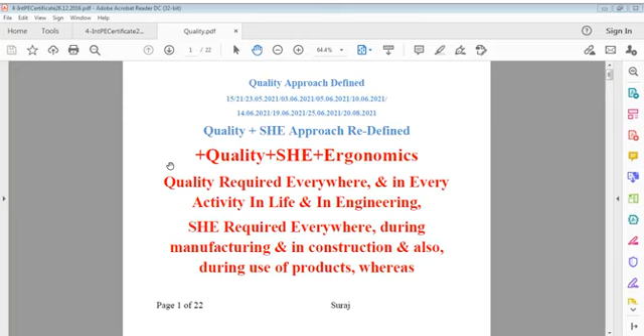Earth is for us. We have to respect that. And if we don't respect that, we do a mistake. We have to respect that. It's our job, it's our duty, and if we don't do that, certainly we shall have to see problems, because it is earth that enriches earth.

My purpose is that one should understand we are doing nothing. In fact, human is nothing. Every human is a body and soul combination. We have nothing of our own, and even this body in which everybody lives is not our own. It is given to us. It was given to us since the beginning of our lives, and we shall use this body till we live, we travel on this planet. When this body is not mine, blood is not mine, soul is mine. Soul cannot be distracted, this is understood.

We have to take safety in our lives. Whatever work we do, payable work or non-payable work, irrespective of that, we have to do it keeping ourselves safe, keeping involved people safe, keeping everybody safe. If we don't do that, certainly we shall suffer. This point must be understood.

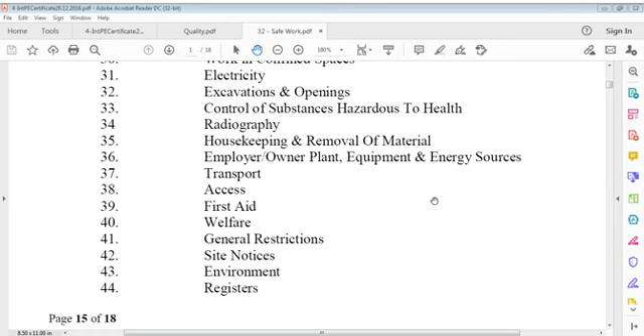These are general, then we can say registers and authorizations. Now we've gone through many points and we have glossary of terms, then we can say responsibility general. We have covered some points in this, and the PPEs etc. we did. I don't want to repeat.

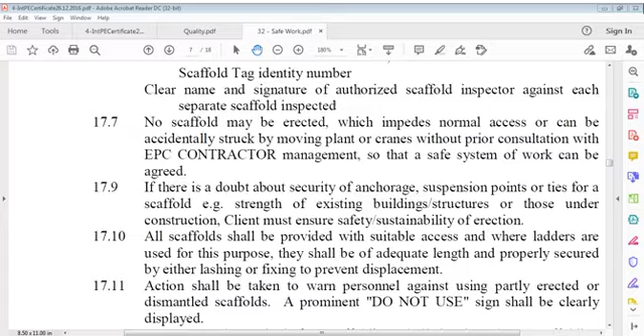Permit to work is a very important point, and also risk assessments and method statements I had done, just a brief on that. Then method statement, we can know it should be further: working at heights, man riding basket, safety harness, scaffolding, ladders. So let's say it's no problem if you go through some repetition, it doesn't make a difference.

Let's say we start with risk assessments. Baskets we had done, then risk assessments: the EPC contractor shall produce risk assessments for all works under control. Risk assessment form shall provide client written information on the following points: identification of all hazards applicable to significant risk activities, details of measures in place to control risk, justification that existing control measures are adequate, and if not, a detailed action plan about how to control risks.

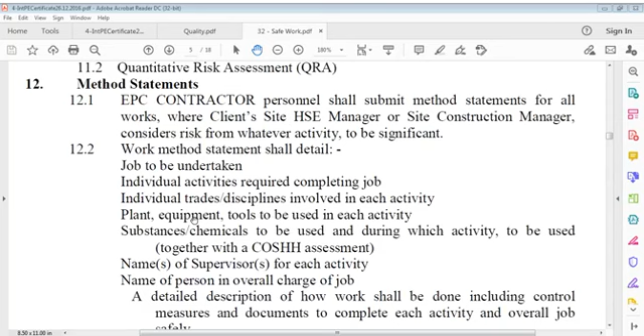So we can say what job is to be undertaken is indicated on the method statement: individual activities required to complete that job, trades or disciplines involved in each activity, what plants, what equipment, what tools shall be used in each activity. These are referred, meaning we will not write everything but references would be written, and substances and chemicals to be used, and during which activity to be used, together with a COSHH assessment.

Supervisors, responsibility supervisors, who is in charge, shall give a detailed description of how work shall be conducted and carried out, including control measures and documents to complete each activity and overall job safety. Now, pre-job discussion—there are so many other points a job description or method statement can include, it depends on each activity.

It depends on what information we need to provide to our personnel on site so they can take care of safety and technicalities. For very nominal, repeated activities they already know, but for a specific activity, the method statement is very important. For normal, repetitive activities, standard method statements can be prepared and referred to.

Standard means a statement that can be applied if it exists, for example for blinding concrete, backfill, shuttering, steel fixing, or curing. We can write such methods and call them standard or normal methods, which can be repeated for general work activities and used every time.

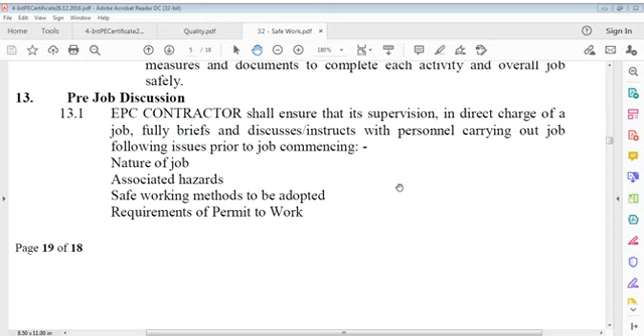Nature of job is the main point—what nature of job it is can be known from the activity. Then, what are the associated hazards—every experienced person should know what can happen while doing something, what problems we can see on site, what dangers to our people or from our machines. That's called associated hazards: electrical hazard, mechanical hazard, human hazard.

Likewise, safe working methods should be adopted to prevent people from the impact of hazards. What way we should work, what is the best method, which is time-saving, which provides safety coverage, and also keeping in view the weather conditions we have to respond to.

Requirements of permit to work—whether you need a work permit depends on the location of your work. If the regulations of the operating authority require that you get this permit, we have to get it. No way out. Working at heights.

Working at height is very dangerous and very difficult if we leave it to our employees or staff alone—it won't work. Contractor personnel shall not interfere with access arrangements, that is scaffolding, ladders, etc. Whatever is required shall have to be done—no way out, because it is a question of life and death. No interference by anybody.

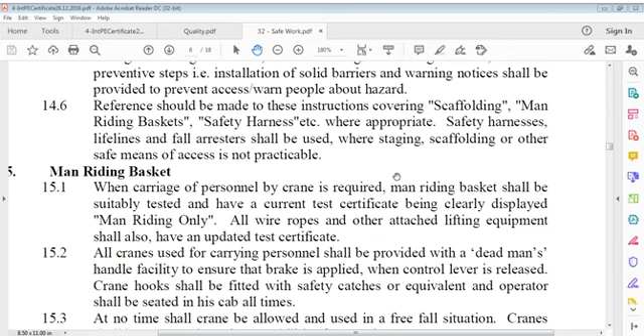Reference should be made to instructions covering scaffolding, man riding baskets, safety harnesses, etc., where appropriate depending on requirement. Safety harnesses, lifelines and fall arresters shall be used—we have explained all this, what is safety harness, lifeline, and fall arresters, already explained in past videos—where staging, scaffolding or other safe means of access is not practicable.

Man riding basket is a very important equipment, like a crane, when carrying personnel by crane is required. The person or worker riding the basket—though man riding basket is the usual term—if not for a man only, otherwise employee riding basket or personal riding basket.

It shall be suitably tested and must have a current test certificate clearly displayed on this machine, man riding only. All wire ropes and other attached lifting equipment shall also have an updated test certificate. All cranes used for carrying personnel shall be provided with dead man's handle facility, to ensure that the brake is applied when the control lever is released.

Crane hooks shall be fitted with safety catches or equivalent, and operators shall be seated in the cab at all times. This means when the control lever is released, crane hooks shall be fitted with safety catches or equivalent, and operators shall remain seated in the cab at all times, won't leave.

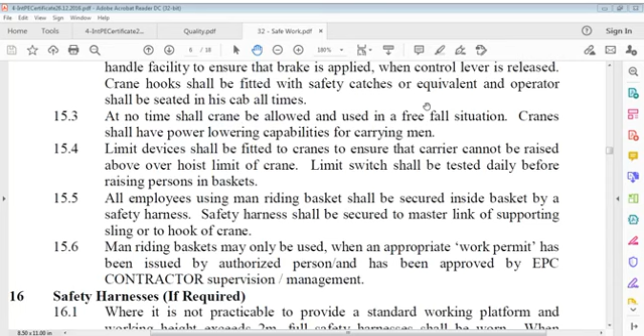Limit devices shall be fitted to cranes to ensure that the carrier cannot be raised above the hoist limit of the crane. The limit switch shall be tested daily before raising persons in a basket.

All employees using or riding in a basket shall be secured inside the basket by a safety harness. The safety harness shall be secured to the master link of the supporting sling or to the hook of the crane.

Man riding baskets may only be used when an appropriate work permit has been issued by an authorized person and has been approved by the EPC contractor, supervisor, or supervising management.

Safety harness if required: where it is not practicable to provide a standard working platform and working height exceeds 2 meters, a full safety harness shall be worn. The height limit is 2 meters, but I consider 1.5 meters better. Full safety harness shall be worn.

When working on open steel, or erecting or dismantling cantilever or hanging scaffolding, a securely attached safety harness and, where required, an inertia reel shall be worn.

Safety harness shall be approved to BS or ANSI EU standards, be properly maintained, and regularly inspected at monthly intervals. A record of such inspection shall be kept by the contractor.

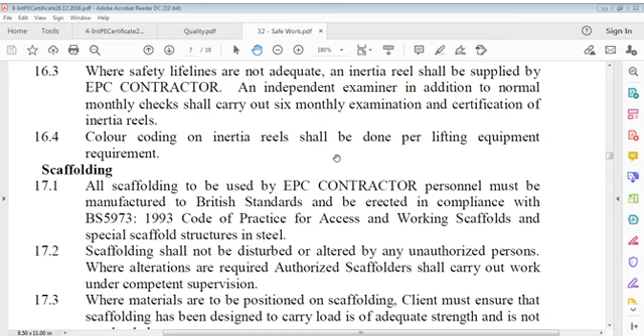An independent examiner, in addition to normal monthly checks, shall carry out 6-monthly examination and certification of inertia reels. Color coding on inertia reels shall be done per lifting equipment requirements.

Scaffolding. All scaffolding to be used by EPC contractor personnel must be manufactured to British standards and erected in compliance with BS 5973:1993, Code of Practice for access and working scaffolds and special scaffold structures in steel.

Scaffolding shall not be disturbed or altered by any unauthorized persons. Where alterations are required, authorized scaffolders shall carry out the work under competent supervision.

Where materials are to be positioned on scaffolding, the client must ensure that the scaffolding has been designed to carry a load of adequate strength and is not overloaded.

Scaffolds shall be inspected at weekly intervals by an authorized scaffold inspector who would sign and date the scaffold tag. After each inspection, scaffolding not considered safe would have the scaffold tag withdrawn and a prominent 'Do not use' sign displayed.

A scaffold register shall be kept by the authorized scaffold inspector. This shall contain the date of first and subsequent weekly inspections, individual identifications of all scaffolds which are to be cross-referenced to the scaffold tag identity number, and the clear name and signature of the authorized scaffold inspector against each separate scaffold inspected.

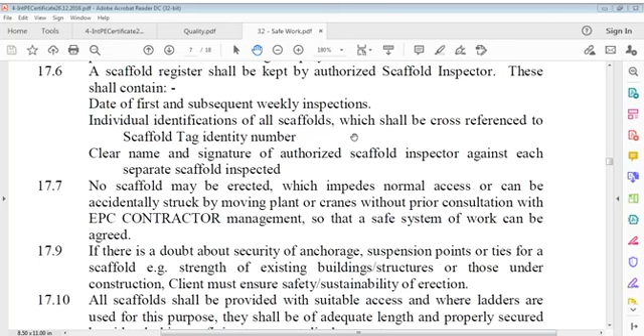If there exists a doubt about the security of anchorage, suspension points, or ties for a scaffold—that is, the strength of existing buildings, structures, or those under construction—the client must ensure the safety and sustainability of the erection. All scaffolds shall be provided with suitable access, and where ladders are used for this purpose these shall be of adequate length.

Ladders shall be of adequate length and properly secured by either lashing or fixing to prevent displacement.

Action shall be taken to warn personnel against using partly erected or dismantled scaffolds. A prominent 'Do not use' sign shall be clearly displayed.

An approved standard for scaffolding shall be issued to scaffolding contractors separately.

Rolling scaffolds shall not be constructed with a height greater than 3 times the minimum base width, and shall only be used on a paved or prepared surface.

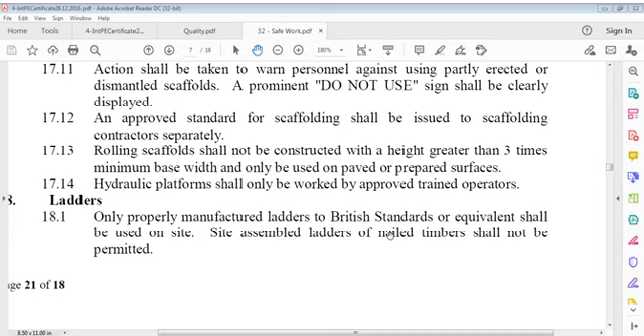Hydraulic platforms shall only be worked by approved trained operators. Only properly manufactured ladders to British standards or equivalent shall be used on site. Site assembled ladders of nailed timber shall not be permitted. Only standard ones can be used - can be aluminium ladder, can be steel ladder, but no timber ladder with nailed construction or nailed joints.

Be properly positioned at base. Extend at least 1 meter, or you can say 5 rungs, above the working platform. Be at an angle of 300mm out for every 1.2 meters - 1 in 4, 1 horizontal, 4 vertical, 1 in 4 for rise. 1 foot out for every 1.2 meters, 4 feet vertical drop. Ladders shall be inspected and color coded per lifting equipment, and a record of inspection retained by contractor.

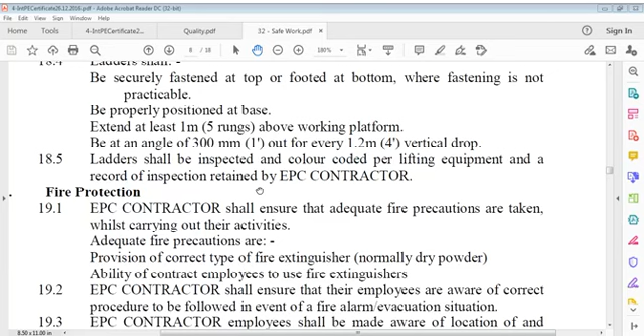Fire protection, which is very significant. Contractors shall ensure that adequate fire precautions are taken whilst carrying out their activities. Adequate fire precautions - what are those? You have to check into that. Adequate fire precautions include provision of correct type of fire extinguisher, position of correct type, provision of means which one you have to use, or requirement of.

Provision of correct type of fire extinguisher, normally dry powder. Ability of contract employees to use fire extinguishers - it has to be made sure that every employee, or at least those responsible, understand how to use fire extinguishers. It's better that everybody on site should know about fire extinguisher use. It's not simply that fire extinguisher is available, but they should know how to use it in an emergency when fire breaks out.

EPC contractor shall ensure that employees are aware of the correct procedure to be followed in the event of a fire alarm evacuation situation. Contractor employees shall be made aware of, and where necessary trained in the correct use of, fire extinguishing equipment, how to use them, alarm call points, emergency telephones, escape routes and fire exits, assembly points, and equipment stopping on alarm.

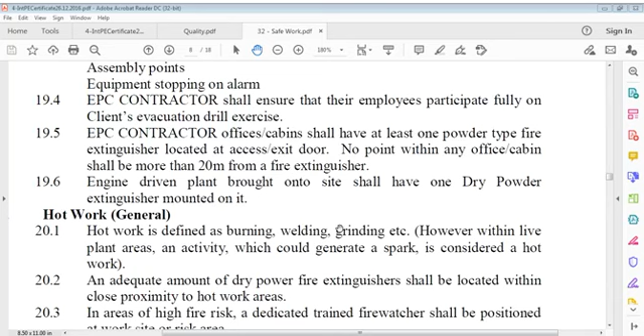Engine driven plant equipment brought onto site shall have one dry powder extinguisher mounted on it.

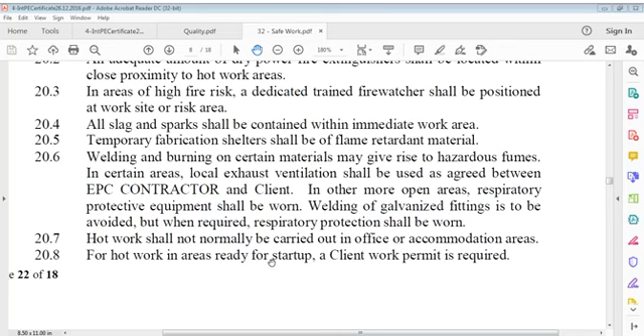Hot work shall not normally be carried out in office or accommodation areas. For hot work in areas ready for startup, a client work permit is required. This is a very important statement for hot work areas; we should take care of this.

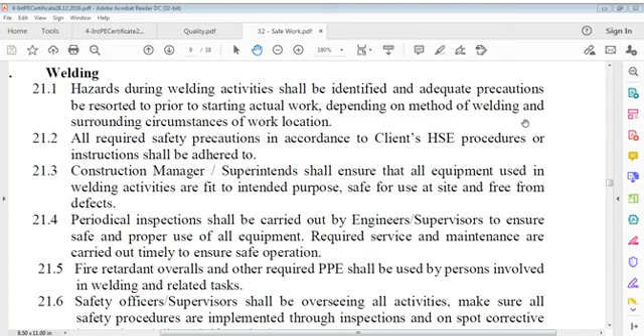The construction manager or superintendent shall ensure that all equipment used in welding activities is fit or suitable for the intended purpose, safe for use at site, and free from defects.

Periodical inspection shall be conducted by engineer supervisors to ensure safe and proper use of all equipment. Required service and maintenance are carried out timely to ensure safe operations, no defects, no deficiency, no problems in operation — that's called safe operation.

Fire retardant overalls and other required PPE, personal protective equipment, shall be used by persons involved in welding and related tasks.

Safety officers or supervisors shall oversee all activities, making sure that all safety procedures are implemented through inspections and on-spot corrective instructions delivered if required. Use of gas and oxygen equipment.

Where EPC contractor brings their own equipment onto the project, such equipment shall comply with approved standards. Cylinders shall comply with BS or equivalent standards, be in good condition and not suffering from corrosion, be properly color coded - black for oxygen, maroon for acetylene, red for LPG, blue for argon, etc. Be individually identified and accompanied by a valid test certificate.

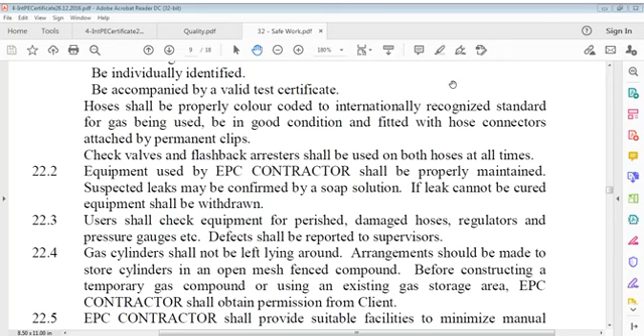Hoses shall be properly color coded. This was for cylinder color - now hoses, there's a difference. Cylinder color and hose color are different. Cylinder colors: black for oxygen, maroon for acetylene, red for LPG, blue for argon - BMRB. These are cylinders. Hoses shall be properly color coded to an internationally recognized standard for the gas being used, be in good condition, and fitted with hose connectors attached by permanent clips. Check valves and flashback arresters shall be used on both hoses at all times.

That is, check valves and flashback arresters shall be used on both hoses at all times.

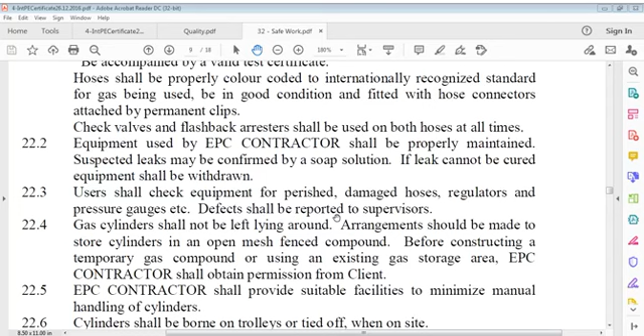Equipment used by EPC contractors shall be properly maintained. Suspected leaks may be confirmed by a soap solution. If a leak cannot be cured, equipment shall be withdrawn from use. Users shall check equipment for perished or damaged hoses, regulators, and pressure gauges, etc. Defects shall be reported to supervisors.

Gas cylinders shall not be left lying around. Arrangements should be made to store cylinders in an open, mesh-fenced compound. Before constructing a temporary gas compound or using an existing gas storage area, EPC contractors shall obtain permission from the client.

EPC contractor shall provide suitable facilities to minimize manual handling of cylinders. Cylinders shall be borne on trolleys or tied off when on site. Oxygen and fuel gas cylinders shall be kept separate with a minimum separation distance of 5 meters. Cylinders shall never be stored or used in a horizontal position but shall be secured in an upright position. Empty cylinders shall also be separated from full cylinders.

All gas cylinders shall be handled with care and shall not be misused or abused. They shall be properly shut off when not in use and safety caps fitted when being moved. Great care shall be taken to ensure that gas equipment, including hoses, is not allowed to cause obstruction of roadways, walkways, manholes, ladders, or other means of access, where they can cause hazards or be damaged.

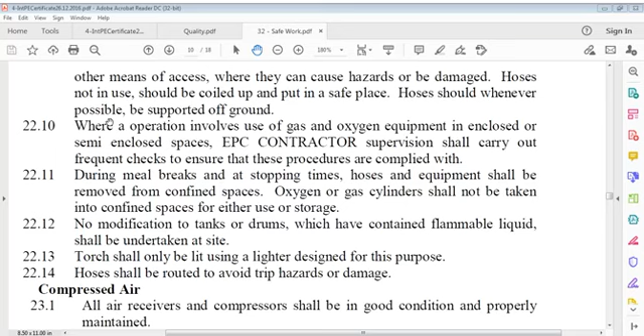No modification to tanks or drums which have contained flammable liquid shall be undertaken at site. The torch shall only be lit using a lighter designed for this purpose. Hoses shall be routed to avoid trip hazards or damage.

Compressed air. All air receivers and compressors shall be in good condition and properly maintained, because compressed air is used by compressors as well as other receivers, and these shall all be in good condition and properly maintained.

Air receivers shall be individually identified and marked with their safe working pressure. All air receivers shall be fitted with a properly set pressure relief valve.

All compressed air fittings shall be wired and/or restrained to prevent them from whipping should a coupling be broken.

Only those clamps designed for compressed air service shall be used. Worm drive or jubilee clips are not acceptable. Compressed air shall never be used for cleaning clothes. Abrasive wheels.

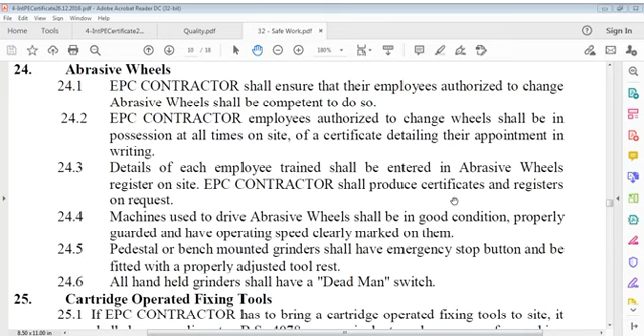Machines used to drive abrasive wheels shall be in good condition, properly guarded, and have operating speed clearly marked on them. Pedestal or bench mounted grinders.

Pedestals or bench mounted grinders shall have an emergency stop button and be fitted with a properly adjusted tool rest. All handheld grinders shall have a dead man switch.

Cartridge operated fixing tools. If EPC contractor has to bring cartridge operated fixing tools to site, it shall be according to BS 4078 or equivalent, and ensure safe working procedures according to manufacturer's instructions.

Only trained and competent persons shall be entrusted to work with cartridge operated fixing tools. Supervisors shall be authorizing competent persons and ensure safe operation throughout the task.

All cartridges shall be stored under lock and key when not in use, and ensure that no unauthorized persons have access to either the tools or cartridges. Required persons involved and affected by operation of such tools would use personal protective equipment.

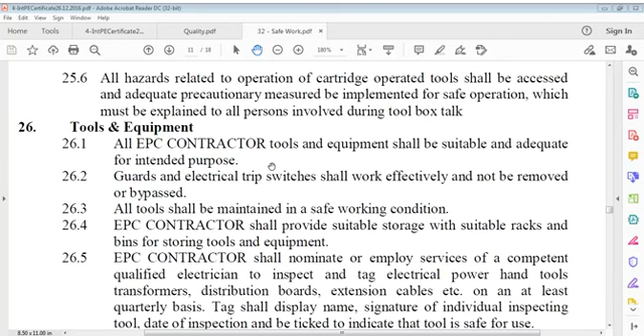All hazards related to operation of cartridge operated tools shall be assessed and adequate precautionary measures be implemented for safe operation, which must be explained to all persons involved during toolbox talk.

Tools and equipment. All EPC contractor tools and equipment shall be suitable and adequate for the intended purpose.

Guards and electrical trip switches shall work effectively and not be removed or bypassed. All tools shall be maintained in a safe working condition.

EPC contractor shall provide suitable storage with suitable racks and bins for storing tools and equipment. EPC contractor shall nominate or employ the services of a competent qualified electrician to inspect and tag electrical power hand tools, transformers, distribution boards, extension cables, etc., on an at least quarterly basis.

The tag shall display the name and signature of the individual inspecting the tool, the date of inspection, and be ticked to indicate that the tool is safe for use. EPC contractor shall keep on site a register of all electrical power hand tools in use.

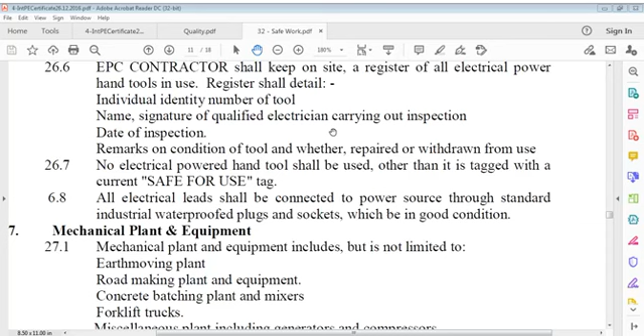All electrical leads shall be connected to the power source through standard industrial waterproofed plugs and sockets which shall be in good condition. Mechanical plant and equipment.

Mechanical plant and equipment includes but is not limited to earth moving plant, road making plant and equipment, concrete batching plant and mixers, forklift trucks, miscellaneous plant including generators and compressors, powered access equipment namely scissor lift, cherry picker, etc., pile driving equipment, and many more.

Again, mechanical plant. Mechanical plant and equipment includes but is not limited to earth moving plant, road making plant and equipment, concrete batching plant and mixers, also concrete pumps, mobile cranes, tower cranes, forklift trucks, miscellaneous plant including generators and compressors, powered access equipment such as scissor lift, cherry picker, etc., pile driving equipment, or whatever else can be included.

Maintenance. All items of mechanical plant transported to the project shall be in safe and sound condition and be properly maintained. A program of regular preventive maintenance shall be established by EPC contractor per the manufacturer's handbook to ensure that all plant and equipment are systematically inspected, maintained and repaired as necessary.

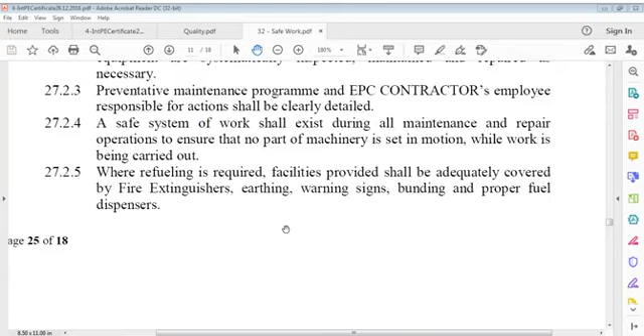Where refueling is required, facilities provided shall be adequately covered by fire extinguishers, earthing, warning signs, bunding and proper fuel dispensers. All waste oil shall be collected and recycled or safely disposed of in accordance with existing regulations pertinent to the environment.

All waste oils shall be collected and recycled or safely disposed of in accordance with existing regulations.

Competency: all drivers and operators of mobile plant and mechanically propelled vehicles shall be in possession of an appropriate license for the class of vehicle. All drivers, operators, bankspersons or banksmen of mobile plant and mechanically propelled vehicles shall be trained. Names and license details of all proposed drivers and operators, along with the class of vehicle to be operated, shall be readily available with the concerned section supervisor at site if required for examination by the client.

General: every dangerous part of machinery shall be securely guarded. Guards removed for maintenance or repair purposes shall be replaced before the machine is set in motion.

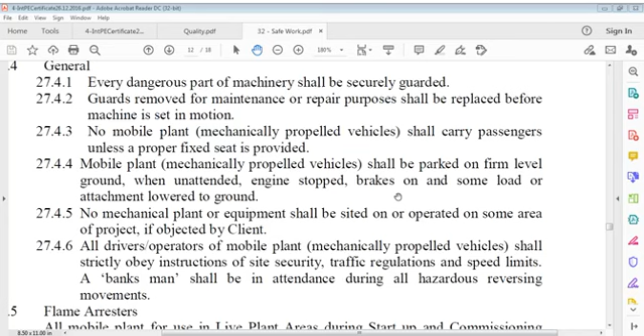No mechanical plant or equipment shall be sited on or operated on any area of the project if objected to by the client.

All drivers and operators of mobile plant and mechanically propelled vehicles shall strictly obey instructions of site security, traffic regulations and speed limits. A bankperson or bankman shall be in attendance during all hazardous reversing movements.

Flame arresters: all mobile plant for use in live plant areas during the startup and commissioning phase of the project shall be diesel driven and fitted with exhaust flame arresters.

Machinery guarding: unauthorized personnel shall not operate, interfere with, or tamper with EPC contractor plant or equipment. Persons authorized to use machines shall first check that guards are in position and that all other safety devices, namely emergency stops, are in working order.

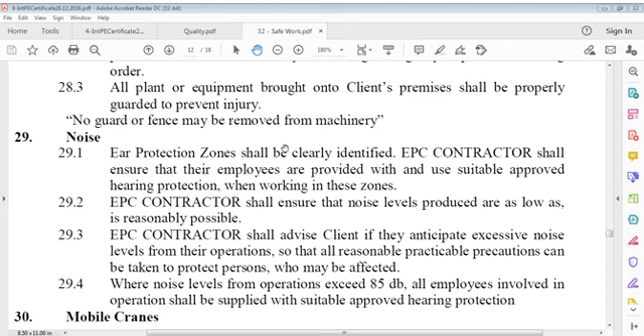All plant or equipment brought onto the client's premises shall be properly guarded to prevent injury. No guard or fence may be removed from machinery.

Noise: ear protection zones shall be clearly identified. EPC contractor shall ensure that their employees are provided with and use suitable approved hearing protection when working in these zones. EPC contractors shall ensure that noise levels produced are as low as reasonably possible.

EPC contractors shall advise the client if they anticipate excessive noise levels from their operations so that all reasonably practicable precautions can be taken to protect persons who may be affected. Where noise levels from operations exceed 85 decibels, all employees involved shall be supplied with suitable approved hearing protection.

Mobile cranes: all cranes shall carry relevant test certificates and thorough examination reports, together with the manufacturer's handbook. This document shall be submitted to the client for inspection before shipment to site.

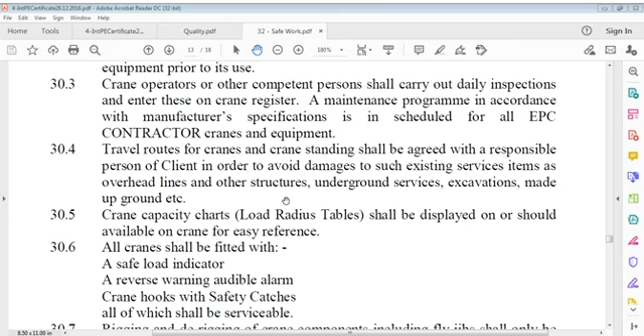Crane capacity chart and load radius table shall be displayed on or available on the crane for easy reference. All cranes shall be fitted with a safe load indicator, a reverse warning audible alarm, and crane hooks with safety catches, all of which shall be serviceable.

Rigging and de-rigging of crane components, including fly jibs, shall only be done under the supervision of a competent lifting supervisor and in compliance with manufacturer's specifications. A lifting supervisor shall be appointed to oversee all lifting operations. The lifting supervisor must ensure that adequate ground bearing capacity is available for lifting operations before setting the locating stations of cranes.

Rigging and de-rigging of crane components, including fly jibs, shall only be done under the supervision of a competent lifting supervisor and in compliance with manufacturer's specifications. A lifting supervisor shall be appointed to oversee all lifting operations, ensuring adequate ground bearing capacity is available before setting locating stations of cranes. Lifting equipment.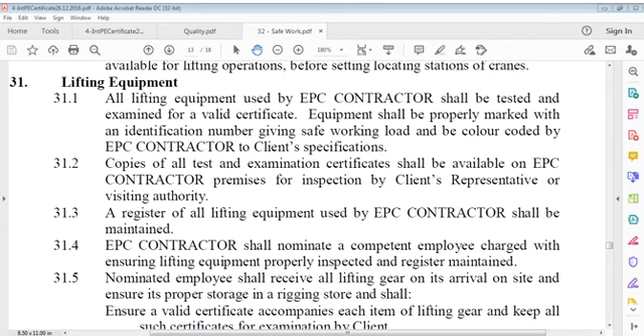Lifting equipment. All lifting equipment used by EPC contractors shall be tested and examined for a valid certificate.

Equipment shall be properly marked with an identification number giving safe working load and be color coded by EPC contractor to client's specifications. Copies of all test and examination certificates shall be available on EPC contractor premises for inspection by client's representative or visiting authority. A register of all lifting equipment used by EPC contractors shall be maintained.

EPC contractor shall nominate a competent person charged with ensuring lifting equipment is properly inspected and register maintained. The nominated employee shall receive all lifting gear on its arrival on site and ensure its proper storage in a rigging store, and shall ensure a valid certificate accompanies each item of lifting gear, keeping all such certificates for examination by client.

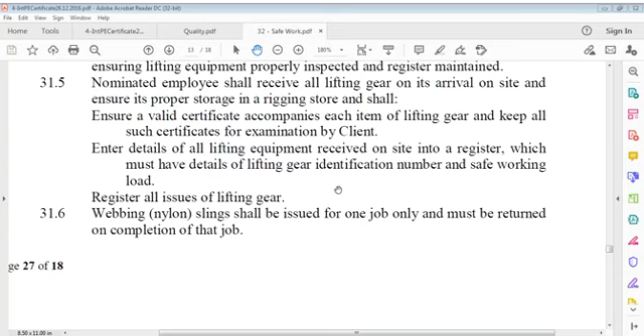Webbing or nylon slings shall be issued for one job only and must be returned on completion of that job. Defective lifting equipment shall be withdrawn immediately from service and returned to the nominated employee. No item of lifting gear shall be used to support a load greater than its safe working load. Lifting equipment and other lifting appliances belonging to EPC contractor shall only be used by EPC contractor personnel.

Reporting of accidents and incidents. EPC contractor shall ensure that their employees report all injuries immediately to client. EPC contractor personnel shall comply fully with reporting of accidents and incidents procedures. Details of all incidents shall be given to client and EPC contractor's HSE officer should conduct an investigation and notify client of its findings. Client shall, where applicable, inform the authorities.

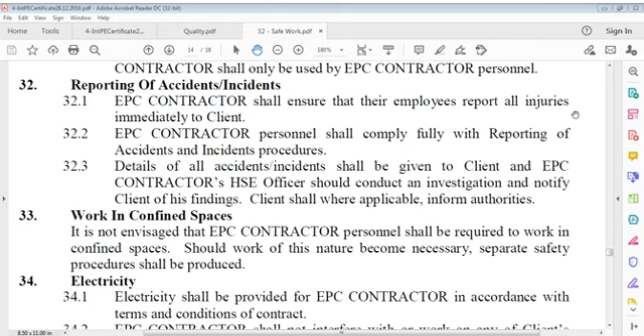Work in confined spaces. It is not envisaged that EPC contractor personnel shall be required to work in confined spaces. Should work of this nature become necessary, a separate safety procedure shall be produced.

Electricity. Electricity shall be provided for EPC contractor in accordance with the terms and conditions of the contract. EPC contractor shall not interfere with or work on any of client's electrical installations.

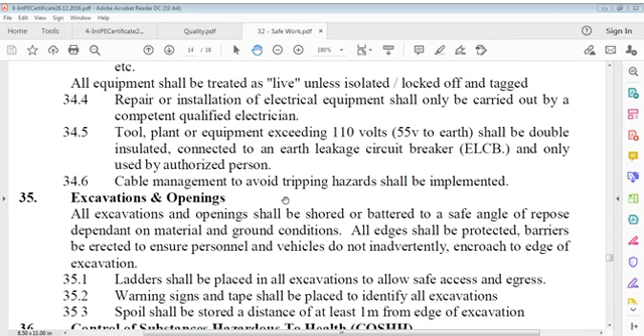All necessary precautions shall be taken to avoid accidental contact with live conductors, etc. All equipment shall be treated as live unless isolated, locked off and tagged. Repair or installation of electrical equipment shall only be carried out by a competent, qualified electrician. Tools, plant, or equipment exceeding 110 volts, 55 volts to earth, shall be double insulated, connected to an earth leakage circuit breaker (ELCB), and only used by an authorized person. Cable management organization to avoid tripping hazards shall be implemented.

Excavations and openings. All excavations and openings shall be shored or battered to a safe angle of repose depending on material and ground conditions. All edges shall be protected, and barriers erected to ensure personnel and vehicles do not inadvertently encroach to the edge of excavation. Ladders shall be placed in all excavations to allow safe access and egress. Warning signs and tape shall be placed to identify all excavations. Spoil shall be stored a distance of at least 1 meter from the edge of excavation.

Control of Substances Hazardous to Health, COSHH. Hazardous substances include flammable liquids or substances likely to give rise to toxic, corrosive, irritant, or harmful risk.

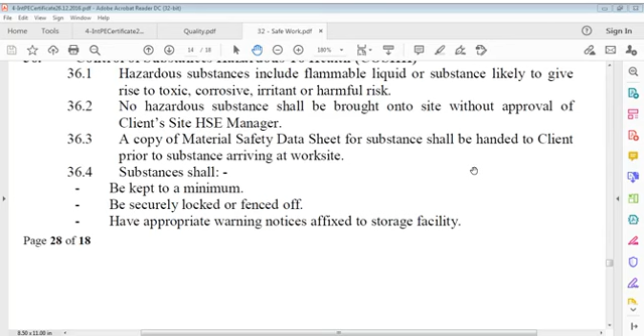No hazardous substance shall be brought onto site without approval of client's site HSE manager. A copy of the material safety data sheet for the substance shall be handed to client prior to the substance arriving at the work site. Substances shall be kept to a minimum, be securely locked or fenced off, have appropriate warning notices affixed to the storage facility, have no smoking notices affixed where flammable substances are stored, and have firefighting extinguishers appropriate to the substance and other emergency equipment including spill equipment located near the containment area.

Substances shall be held in secure appropriate containers with the substance clearly identified on the exterior of the container. All containers holding hazardous substances shall have their lids replaced as soon as they are not in use. Only minimum quantities required should be removed from the approved store at one time.

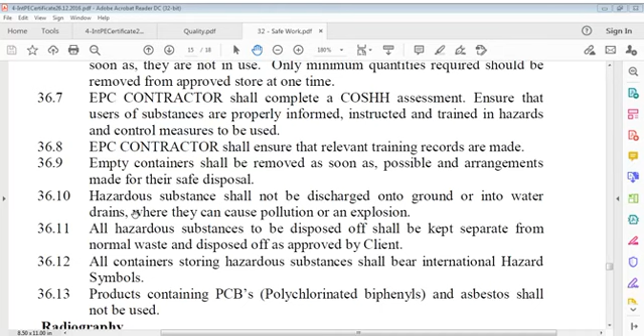EPC contractors shall complete a COSHH assessment. As we just discussed COSHH, we studied COSHH, you remember? It's very important - that is control of substances hazardous to health, or COSHH.

EPC contractors shall complete a control of substances hazardous to health assessment, ensure that users of substances are properly informed, instructed, and trained in hazards and control measures to be used. EPC contractors shall ensure that relevant training records are made.

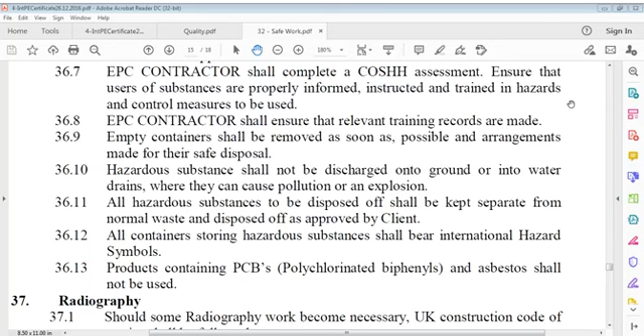Empty containers shall be removed as soon as possible and arrangements made for their safe disposal. Hazardous substances shall not be discharged onto ground or into water drains where they can cause pollution or an explosion.

All hazardous substances to be disposed of shall be kept separate from normal waste and disposed of as approved by client. All containers storing hazardous substances shall bear international hazard symbols.

Products containing PCB, that is polychlorinated biphenyls, and asbestos shall not be used.

Should some radiography work become necessary, the UK Construction Code of Practice shall be followed.

All personnel, including visitors, shall be informed of hazards and procedures for safe handling of all hazardous materials which they may encounter on their work.

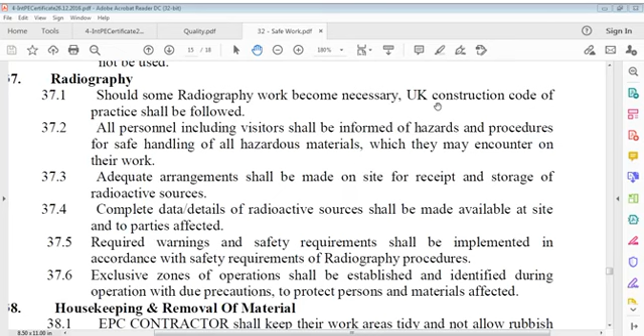Adequate arrangement shall be made on site for receipt and storage of radioactive sources. Complete details of radioactive sources shall be made available at site and at the parties affected.

Required warnings and safety requirements shall be implemented in accordance with safety requirements of radiography procedures. Very important: exclusive zones of operations shall be established and identified during operations with due precautions to protect persons and materials affected.

Housekeeping and removal of material. EPC contractor shall keep their work areas tidy and not allow rubbish or scrap to accumulate. If a storage area is required, an approach shall be made to client so that a request can be considered, and where appropriate, an area could be allocated for this purpose.

That is, area for rubbish or scrap to accumulate. EPC contractors shall keep their work areas tidy and not allow rubbish or scrap to accumulate. If a storage area is required, an approach shall be made to client so that a request can be considered, and where appropriate, an area could be allocated for this purpose.

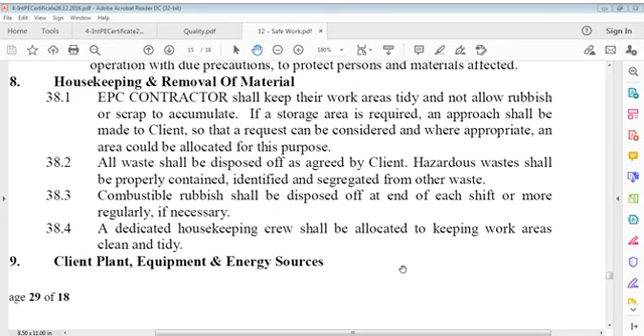A dedicated housekeeping crew shall be allocated to keeping work areas clean and tidy. Client plant, equipment and energy sources.

EPC contractor shall not use or operate plant, equipment or energy sources belonging to client unless an authorized person has given permission in writing to do so. If authorization is given to connect tools or equipment to client's energy sources, contractors shall ensure that they employ competent workmen or persons who are familiar with appropriate functioning of plant or equipment.

Transport. Only those vehicles necessary for construction operations shall be permitted to enter the construction site. All vehicles shall be roadworthy.

That's an important point - all vehicles shall be roadworthy and conform to legal requirements. All vehicles shall be well maintained. Exhaust emissions shall be clean with no visible black smoke.

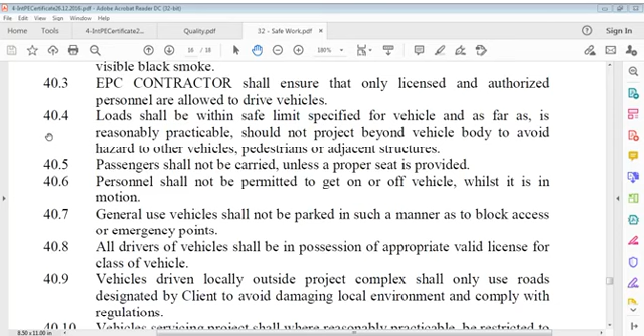Passengers shall not be carried unless a proper seat is provided. Personnel shall not be permitted to get on and off vehicle whilst it is in motion. General use vehicles shall not be parked in such a manner as to block access or emergency points. All drivers of vehicles shall be in possession...

All drivers of vehicles shall possess an appropriate valid license for the class of vehicle. Vehicles driven locally outside the project complex shall only use roads designated by the client to avoid damaging the local environment and comply with regulations. Vehicles servicing the project shall, where reasonably practicable, be restricted to driving on public highways during daylight hours. EPC contractor vehicles and cranes shall only use recognized safe roads and access points to work areas, and only authorized routes shall be used to and from work sites. No road shall be closed off without approval from the client and issue of a road closure permit.

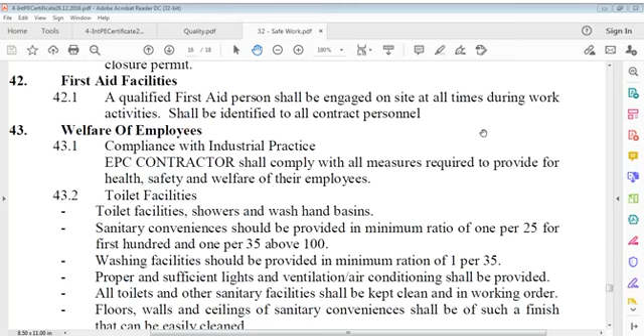Compliance with industrial practice: EPC contractors shall comply with all measures required to provide for the health, safety and welfare of its employees. This includes toilet facilities, showers and wash hand basins.

Sanitary conveniences should be provided in a minimum ratio of 1 per 25 for the first 100 persons, and 1 per 35 above 100. Washing facilities should be provided in a minimum ratio of 1 per 35.

Proper and sufficient lighting and ventilation, and air conditioning, shall be provided. All toilets and other sanitary facilities shall be kept clean and in working order.

Sanitary conveniences should be provided in a minimum ratio of 1 per 25 for the first 100, and 1 per 35 above 100. Washing facilities should be provided in a minimum ratio of 1 per 35. Proper and sufficient lighting and ventilation, air conditioning, shall be provided. All toilets and sanitary facilities shall be kept clean and in working order. Floors, walls and ceilings of sanitary conveniences shall be of a finish that can be easily cleaned. All sanitary conveniences and washrooms shall have window openings to outside air or be provided with ventilation systems which change the air at least 6 times per hour. The proportion of window surface shall not be less than 10% of the floor area.

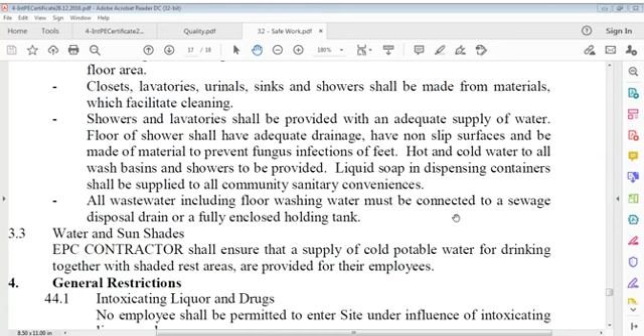Water and sunshades: EPC contractors shall ensure that a supply of cold potable water for drinking, together with shaded rest areas, are provided for their employees.

General restrictions. Intoxicating liquor and drugs: no employee shall be permitted to enter the site under the influence of intoxicating liquor or drugs. Possession or consumption of drugs, other than for medicinal purposes, or of alcoholic liquor, on site is strictly prohibited.

Conduct: the EPC contractor shall ensure that all persons under its control conduct themselves in a safe, orderly and seemly manner on the project and do not indulge in hooliganism or horseplay. The EPC contractor shall take such steps as are practical to make their employees aware of local community requirements, social aspects, and respect for local culture.

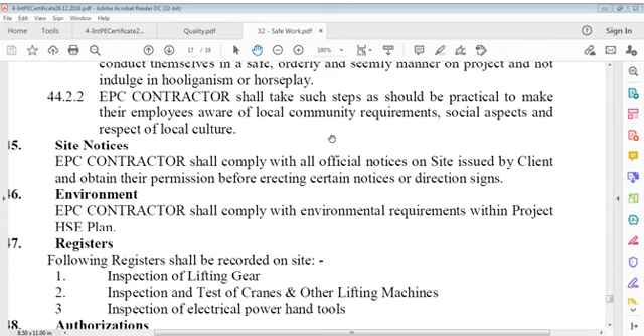Site notices: the EPC contractor shall comply with all official notices on site issued by the client, and obtain permission before erecting certain notices or direction signs. Environment: the contractor shall comply with environmental requirements within the project HSE plan.

Registers: the following registers shall be recorded on site: inspection of lifting gear, inspection and test of cranes and other lifting machines, and inspection of electrical power hand tools.

Authorization: the following persons shall require authorization from the EPC contractor's site organization management during their work: drivers and operators of mobile cranes, drivers and operators of mobile plant, mechanically propelled vehicles, banksmen for mobile cranes, persons authorized to change abrasive wheels, drivers of cars, lorries, vans and pickups, fire watchers, and first aiders.

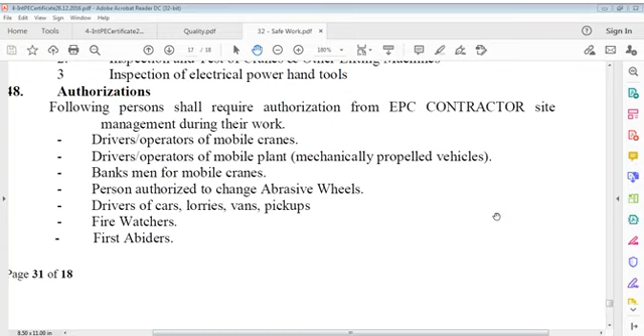Well, I think we are done.

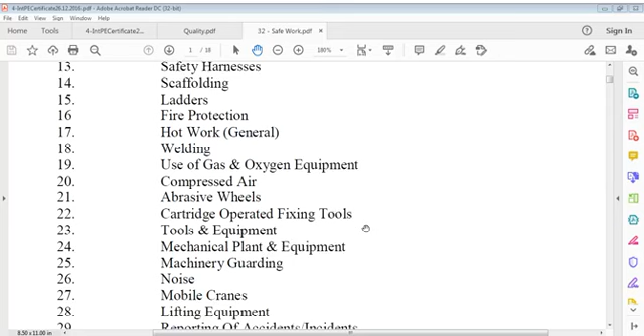Working procedures, which is not very descriptive, but we have studied all this in past videos as a refresher. This is introduction: personal protective equipment, HSE orientation courses and site access, safety officer, supervisors and safety officers language, PTW, risk assessments, method statements, pre-job discussion, working at heights, man riding baskets, safety harnesses, scaffolding, ladders, fire protection, hot work, welding, use of gas and oxygen equipment, compressed air, abrasive wheels, cartridge operated fixing tools, tools and equipment, mechanical plant and equipment, machinery guarding, noise, mobile cranes, lifting equipment, reporting of accidents, incidents, work in confined space, electricity, excavations and openings, control of substances hazardous to health, radiography, housekeeping and removal of material, employer owned plant, equipment and energy sources, transport, access, first aid, welfare, general restrictions, site notices, environment registers.

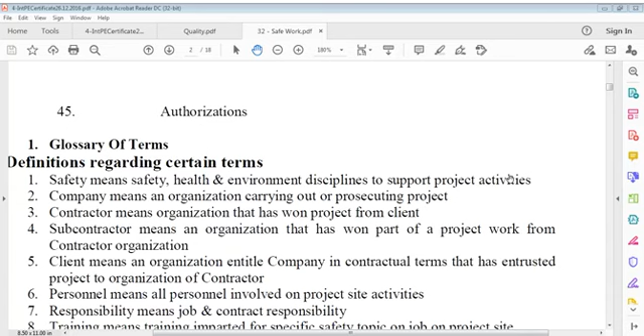These are terms, some terms, and of course means general. These are.

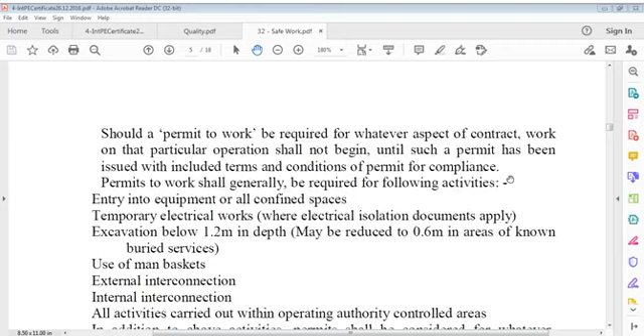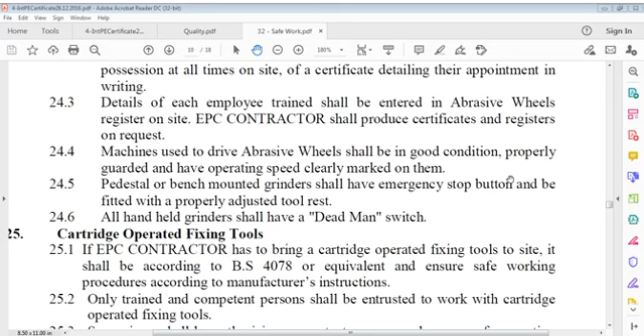We discussed introduction, then personal protective equipment: eye protection, hearing protection, respiratory protection, safety footwear, gloves, safety harness, overalls, other PPEs, HSE orientation courses and site access, health safety environment officer, permit to work, risk assessments, method statements, pre-job discussion, working at heights, man riding baskets, safety harness and scaffolding, ladders, hot work, fire protection, hot work, welding, use of gas and oxygen equipment, compressed air, abrasive wheels, cartridge operated fixing tools, tools and equipment.

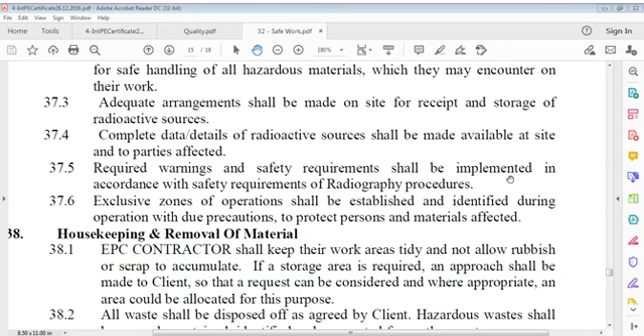Mechanical plant and equipment, machinery guarding, noise, mobile cranes, lifting equipment, reporting of accidents, incidents, work in confined spaces, electricity, excavations, openings, control of substance hazardous to health, radiography, housekeeping and removal of material, client, plant, equipment, energy sources, transport, access, EPC contractor, first aid facility, welfare of employees, general restrictions, site notices, environment registers, authorizations, likewise.

Inspections and audits. It's very interesting. Inspections and audits means whatever work we do on site, inspections are very important from every point of view. Audits are also very important from every point of view, and this is also required in our safety, or you can say according to systems.

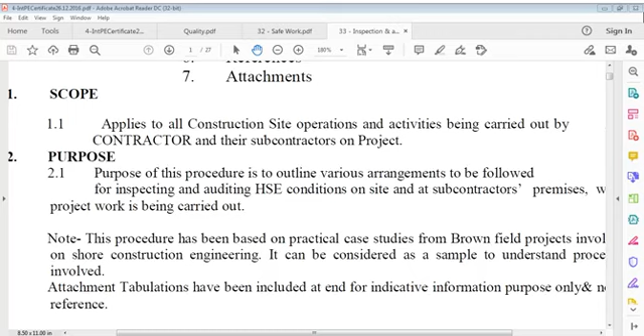According to systems, you can say HSE inspections and audits. In this we have scope, then purpose, definitions, responsibilities in general, respecting certain contract positions and instructions, and then various teams activities likewise, and then we have to see different lists here. We will go through that, subcontract areas, more of this different type of talk. Various bases are given in this, you can see forms are also available. Then management audits, what we should or should not do, and you can say leadership, organization, and administration.

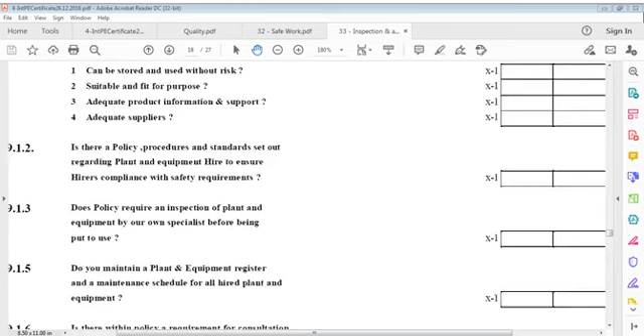We'll go through, because this is technical, this appears very technical. We'll go through one by one and see how to do it. I will search on the web also for the statements, and so it's like that. We'll go there in this. For the HSE inspections audit, I'd like to say something on this also.

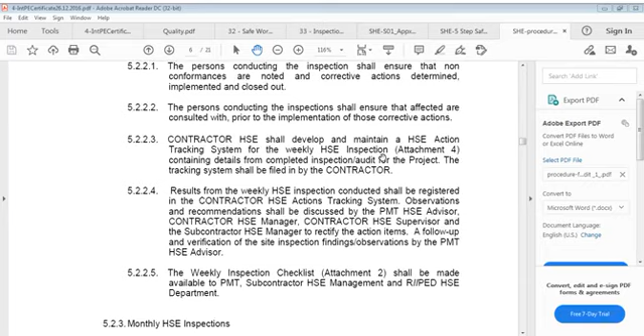It's over, so, inspections and audit. But first, let me see what's the purpose of this. It applies to all construction site operations and activities being carried out by contractor and their subcontractors on the project.

Applies to all construction site operations and activities being carried out by contractor and their subcontractors on the project. The purpose of this procedure is to outline various arrangements to be followed for inspecting and auditing HSE conditions on site and at subcontractors' premises where project work is being carried out.

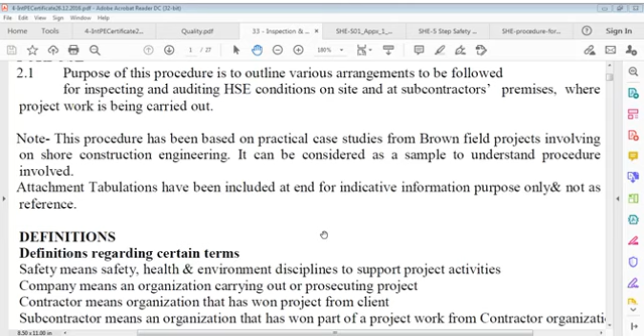This procedure has been based on practical case studies from brownfield projects involving onshore construction engineering. It can be considered as a sample to understand procedures involved. Attachment tabulations have been included at the end for indicative information purpose only, and not as reference.

Now I'll go to this document. It's my first document, and that is NHS - this is NHS partnership, I'm just giving reference. Safety, health, environment, health and safety audit and workplace inspection procedures. Now this is a partnership, you can say All Devon Partnership.

NHS trust working activities are subject to risk assessment as part of the organization's safety management system. From risk assessment come workplace precautions and risk control systems that are involved in the following 4 key areas. They are all concerned with work activities.

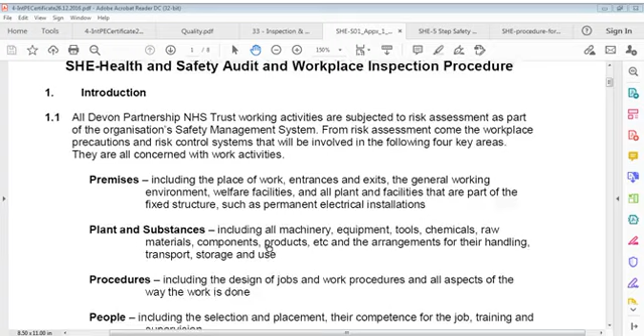Premises - what is premises? Including place of work, entrances and exits, general working environment, welfare facilities, and all plant and facilities that are part of fixed structures, such as permanent electrical installations. Plant and substances, including all machinery, equipment, tools, chemicals, raw materials, components, products, etc., and arrangements for their handling, transport, storage, and use.

It's including all machinery, plant and substances - very important part - including all machinery, equipment, tools, chemicals, raw materials, components, products, etc., and arrangements for their handling, transport, storage, and use.

Procedures, including design of jobs and work procedures and all aspects of the way work is done. People, including selection and placement, their competence for the job, training and supervision.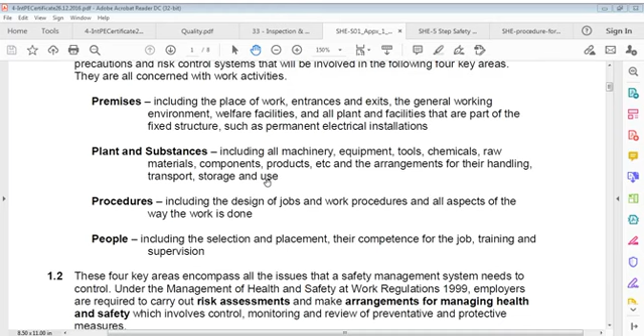These 4 key areas - what are these 4 key areas? One is premises, plants and substances, procedures and people. These 4 key areas encompass all issues that the safety organization management system needs control over.

Under Management of Health and Safety at Work Regulations 1999, employers are required to carry out risk assessments and make arrangements for managing health and safety, which involves control, monitoring and review of preventive and protective measures. These 4 key areas encompass all issues that health and safety management organization systems require control over.

Trust requires effective systems to review safety organization performance, and such monitoring systems include workplace inspections, vehicle inspections, self-audits, and regular analysis of accidents and incidents.

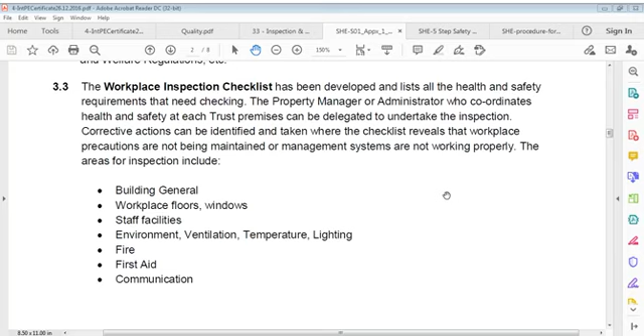A workplace inspection checklist has been developed that lists all health and safety requirements needing checking. A property organizer, manager, or administrator who coordinates safety and health at each trust premises can be delegated to undertake inspection. Corrective actions can be identified and resorted to where the checklist reveals that workplace precautions are not being maintained or organization management systems are not working properly.

Building general, workplace floors, windows, staff facilities, environment, ventilation, temperature, lighting, fire, first aid, communication, personal protection, housekeeping.

A safety and health self-audit form has been designed for senior organizers, managers, or service unit managers to take an overview of safety and health standards and ensure that safe working practices are in place. Part of the audit, for example, would be to check that workplace inspections have been undertaken effectively at each property site and to ensure that identified actions have been taken.

The self-audit form has identified the following various topic areas. These require checking to ensure compliance with safety and health legislation and to ensure trust policies and procedures are in place throughout the area and fit for purpose.

Safety management review. Safety organization review. Arrangements for safety and health: to audit evidence of systems in place for risk assessments, fire precautions, safety systems of work, manual handling, first aid, personal protective equipment, housekeeping, and working environment.

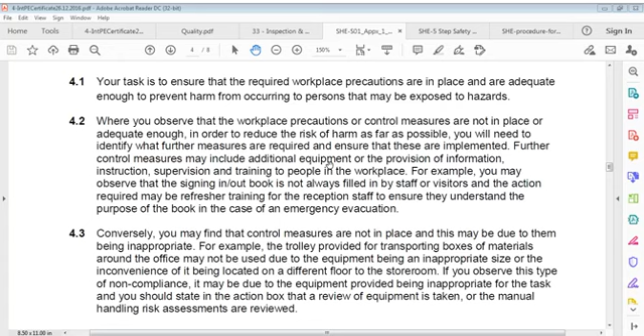Observe that workplace precautions or control measures are not in place. Wherever it's observed that workplace precautions are required but control measures are not working, not adequate enough to reduce risk of harm as far as possible, it is required to identify what further measures are needed and ensure these are implemented. Further control measures may include additional equipment or provision of information, instruction, supervision, and training to people at the workplace.

For example, observe that the signing in/out book is not always filled in by staff or visitors, and the action required may be refresher training for reception staff to ensure they understand the purpose of the book in case of an emergency evacuation.

Conversely, you may find that control measures are not in place, and this may be due to them being inappropriate. For example, a trolley provided for transporting boxes of materials around the office may not be used due to the equipment being an inappropriate size or the inconvenience of it being located on a different floor to the storeroom.

If this type of non-compliance is observed, it may be due to equipment provided being inappropriate for the task or intended purpose, and you should state in the action box that a review of equipment is required or that manual handling risk assessments are reviewed.

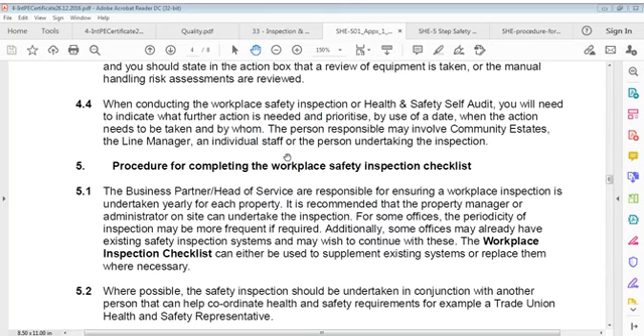When conducting a workplace safety inspection or safety and health self-audit, it is required to indicate what further actions are necessary, what should be prioritized, by use of a date when action must be taken and by whom it is the responsibility. The person responsible may involve community estates, line managers, individual staff, or the person undertaking the inspection.

Procedure for completing the workplace safety inspection checklist. The business partner and service head are responsible for ensuring a workplace inspection is undertaken yearly for each property. It is recommended that the property manager, organizer, or administrator on site undertake the inspection.

For some offices, the periodicity of inspection may be more frequent if necessary. Additionally, some offices may already have existing safety inspection systems and may wish to continue with these. The workplace inspection checklist can either be used to supplement existing systems or replace them where necessary.

Where possible, the safety inspection should be undertaken in conjunction with another person who can help coordinate safety and health requirements, for example a trade union safety and health representative. In order to inspect the whole site as systematically as possible, it is best to divide the office premises into different sections: administration or reception area, offices area, storage room, kitchen, training rooms, meeting rooms, car park, and other outside areas.

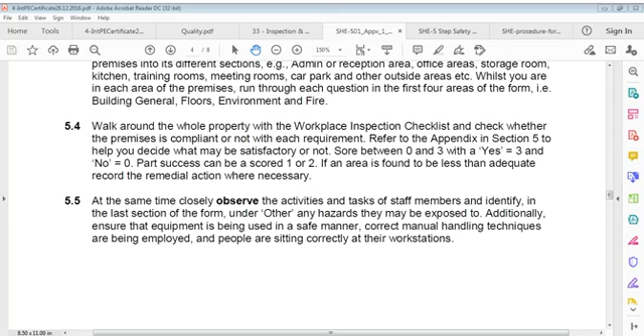At the same time, closely observe activities and tasks of staff members and identify, in the last section of the form under 'any other', whatever hazards they may be exposed to. Additionally, ensure that equipment is being used in a safe manner, correct manual handling techniques are being employed, and people sit correctly at their workstations.

Once the safety inspection has been completed, it is important to communicate to the person responsible, as identified on the form, what further action is needed and the date due depending on its priority. Gain line management's commitment for that.

The original of the workplace inspection must be kept with the health and safety files at the office. A copy should also be sent to the business partner responsible for the area and the health and safety manager.

It is important to monitor outstanding actions recorded on the workplace inspection checklist at a specified period of time after the inspection, namely one month. This is to ensure that those identified as persons responsible for actions have completed them. Once an action has been completed, this must be signed off and dated by the line manager or designated safety and health coordinator, whichever applicable.

Procedure for completing a health and safety self-audit. A safety and health self-audit provides an overview of the level of hazards, health and safety standards and performance in a unit or work activity.

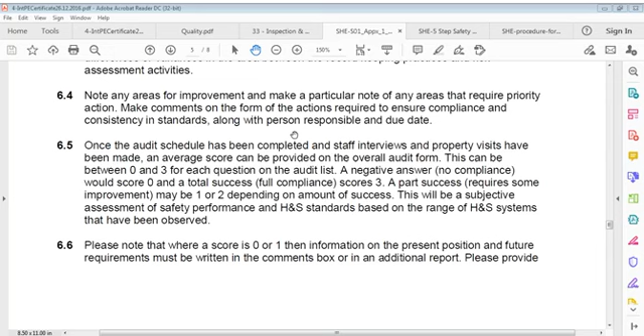A negative answer, no compliance, will score 0, and total successful compliance scores 3. A part success requires some improvement, maybe 1 or 2, depending on the amount of success. This is a subjective assessment of safety performance and H&S standards based on the range of H&S systems that have been observed.

Once the audit is completed, a copy of the report may require sending to the appropriate business partner for their information and required action. File a copy in your safety and health area safety files.

Findings should be discussed at the organization management meeting and the health and safety committee meeting. Accordingly, an action plan requires developing to ensure required actions are completed within a certain time frame.

A completed safety and health audit form requires sending to the safety and health organization manager following the audit. This is required for corporate monitoring purposes, to identify emerging risks and concerns, and for the annual safety and health report to the Trust Board.

Further information and advice: the safety and health manager or organizing manager shall provide further information and advice regarding workplace inspections and the self-audit process. The Safety and Health Committee undertakes monitoring and review of workplace inspection and health and safety self-audit procedures.

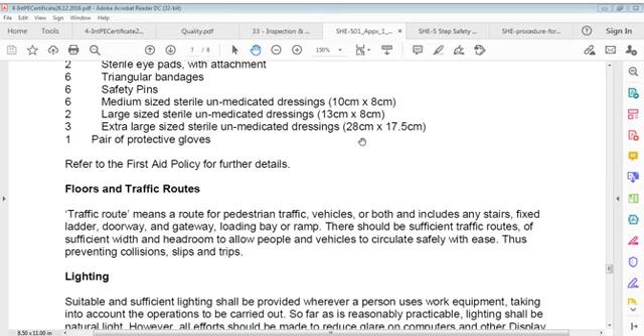Sufficient quantities of each item should always be available in every first aid box or container. In most cases these shall be: guidance card, 1 number; 20 number individually wrapped sterile adhesive dressings, assorted sizes; 2 number sterile eye pads with attachment; 6 number triangular bandages; 6 number safety pins; 6 number medium size sterile unmedicated dressings, 10 cm by 8 cm; large size sterile unmedicated dressings, 13 cm by 8 cm; extra large size sterile unmedicated dressings, 28 cm by 17.5 cm; and 1 number pair of protective gloves.

So the quantities for all items are 1, 20, 2, 6, 6, 6, 2, 3, 1. Now refer to the first aid policy for further details.

Floors and traffic routes. A traffic route means a route for pedestrian traffic, vehicles, or both, and includes stairs, fixed ladders, doorways, gateways, loading bays or ramps.

There should be sufficient traffic routes of sufficient width and headroom to allow people and vehicles to circulate safely with ease, thus preventing collision, slips and trips.

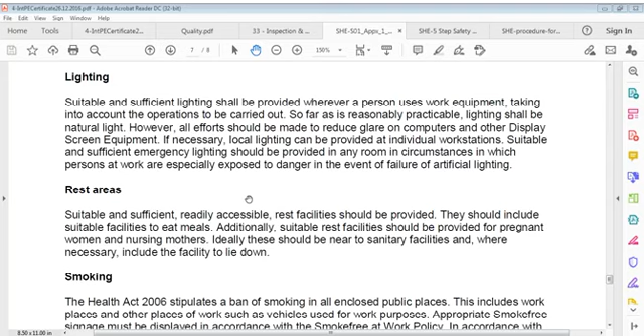Lighting: suitable and sufficient lighting shall be provided wherever a person uses work equipment, taking into account the operations to be carried out. So far as is reasonably practicable, lighting shall be natural. However, all efforts should be made to reduce glare on computers and other display screen equipment. If necessary, local lighting can be provided at individual workstations. Suitable and sufficient emergency lighting should be provided wherever persons at work are specially exposed to danger in the event of failure of artificial lighting.

Rest areas: suitable and sufficient readily accessible rest facilities should be provided. These should include suitable facilities to eat meals. Additionally, suitable rest facilities should be provided for pregnant women and nursing mothers. Ideally, these should be near sanitary facilities and, where necessary, include a facility to lie down.

Smoking: the Health Act stipulates a ban on smoking in all enclosed public places. This includes workplaces and other places of work such as vehicles used for work purposes. Appropriate smoke-free signage must be displayed in accordance with the smoke-free at work policy. In accordance with trust policy, the trust is committed to being smoke-free for patients and staff, and smoking is not permitted on trust property.

Storage of clothing: adequate, suitable and secure space should be provided for staff to store their own clothing and whatever special clothing is required to undertake work.

Storage facilities: storage areas should be defined within the workplace. Requirements should be reviewed periodically and whenever refurbishment or relocation affects them. Articles and substances shall be stored in defined areas at all times.

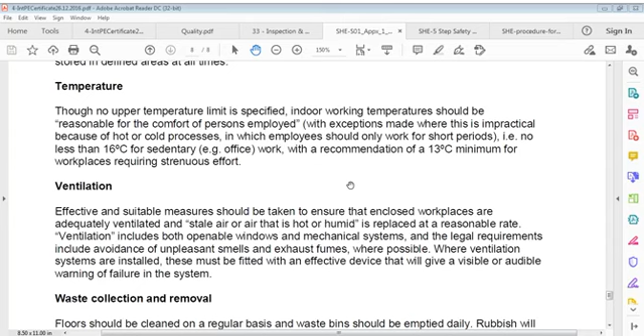Temperature: though no upper temperature limit is specified, indoor working temperature should be reasonable for the comfort of persons employed, with exceptions made where this is impractical because of a hot or cold process, in which case employees should only work for short periods. The recommendation is no less than 16 degrees Celsius for sedentary, namely office work, with a minimum of 13 degrees Celsius for workplaces requiring strenuous activity.

Ventilation: effective and suitable measures should be taken to ensure that enclosed workplaces are adequately ventilated, and stale air or air that is hot or humid is replaced at a reasonable rate. Ventilation includes both openable windows and mechanical systems, and legal requirements include avoidance of unpleasant smells and exhaust fumes. Where ventilation systems are installed, they must be fitted with an effective device that gives a visible or audible warning of failure in the system.

Waste collection and removal: floors should be cleaned on a regular basis and waste bins should be emptied daily. Rubbish should be kept in suitable containers and not be allowed to overflow. Combustible waste must be kept away from ignition sources. Large items of rubbish that pose a particular hazard, such as obsolete items of furniture, should be removed without delay.

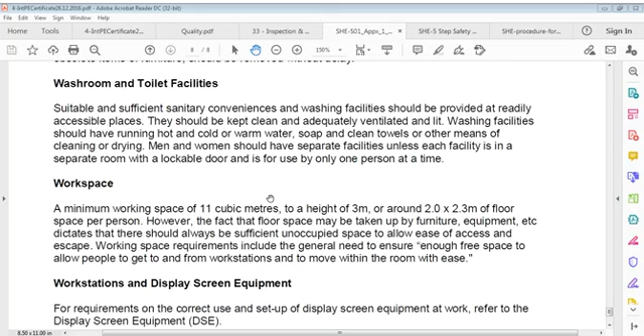Washroom and toilet facilities: suitable and sufficient sanitary conveniences and washing facilities should be provided at readily accessible places. They should be kept clean and adequately ventilated and lit. Washing facilities should have running hot and cold or warm water, soap, and a clean towel or other means of cleaning or drying. Men and women should have separate facilities unless each facility is in a separate room with a lockable door and is for use by only one person at a time.

Workspace: a minimum working space of 11 cubic meters to a height of 3 meters, or around 2.0 by 2.3 meters of floor space per person. However, the fact that floor space may be taken up by furniture, equipment, etc. dictates that there should always be sufficient unoccupied space to allow ease of access and escape. Working space requirements include the general need to ensure enough free space to allow people to get to and from workstations and to move within the room with ease.

Workstations and display screen equipment: for requirements on the correct use and setup of display screen equipment at work, refer to the relevant guidance.